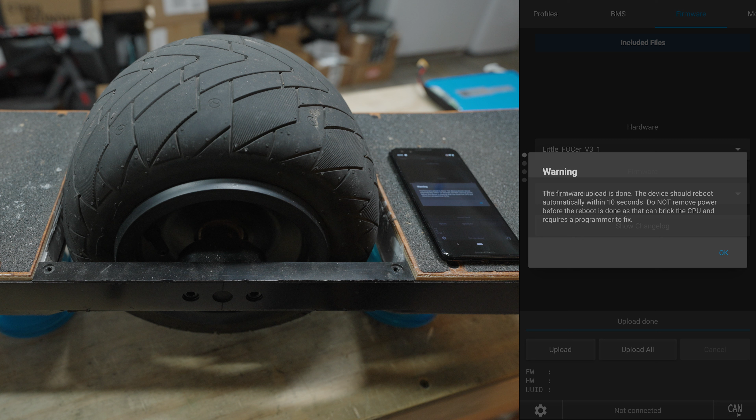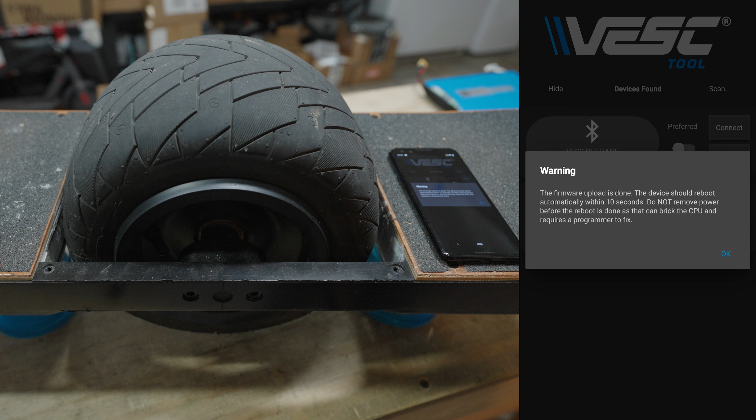It gives us the warning that the upload is done. It should reboot automatically within 10 seconds. I usually give it about 20, and then I scan for the device again. So we'll tap OK.

We've waited long enough. Hit scan up on the top right, scan BLE, and they show up again. So that means that this is on, and we will connect to the little built-in Bluetooth. Now on the firmware tab, it shows that firmware is 6.2, so that's the current firmware, and all the settings in this board are gone.

So we are going to start from scratch. We're going to go over to the Start tab. This is the main screen that you see on the mobile version when you first open up VESC Tool and connect. It shows the button for disconnect because we are connected, and you can see some RT data. This is all going to be wrong because it's not set up properly.

However, if you scroll to the top little dot, the first menu, you can see your battery input voltage. So right there, it's at 75 volts. This is an 84 volt battery, and it's roughly about half-ish. And you have your motor temperature and your VESC temperature.

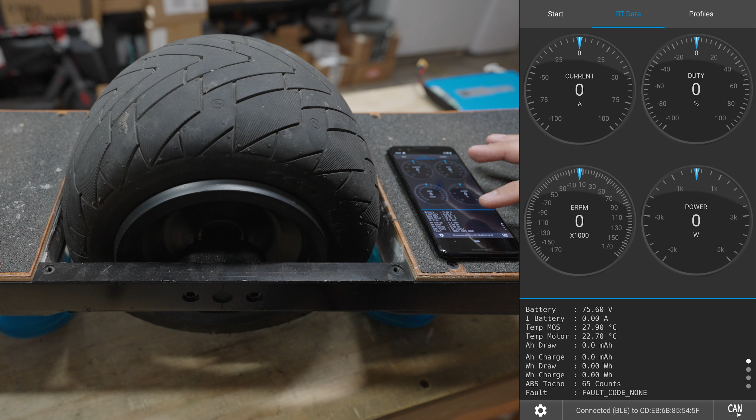So temp MOS is the temperature of the MOSFET. Temp motor is the temperature of the motor. No fault codes, that's all great. The IMU is not set up, so it's not reading anything. And so that's your information.

But we're gonna go back to the start. And before I actually do any of this stuff, we're gonna talk about battery stuff, because knowing what battery is in your device and being able to figure out some numbers is, in my opinion, very important to setting up your device.

Inputting proper values, and understanding what those values mean in terms of how it works. So, lithium-ion battery in here, using lithium-ion cells. This is going to be for demonstration. I have a stock XR battery right here, and so we're going to start with some math.

For lithium-ion batteries, regardless of the configuration, I find it useful to think of it in terms of a single cell. When we're talking about voltages, I like to think of things in terms of a single cell. And there are only 4 values, really, that you need to know and internalize for a single cell. And from there, you can figure everything else out. First, and I will have this in an article that I will link to in the description below, explaining that in more detail.

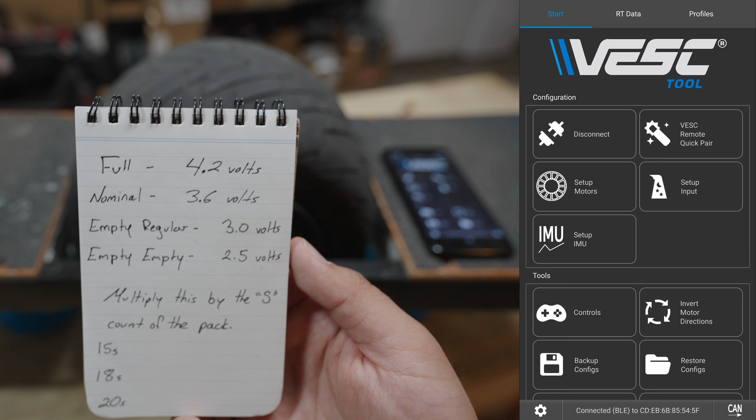So, 4 values. First one, full. A lithium-ion battery cell, a single cell, full is 4.2 volts. That's what it charges to. That's when it's full. Going above that is bad.

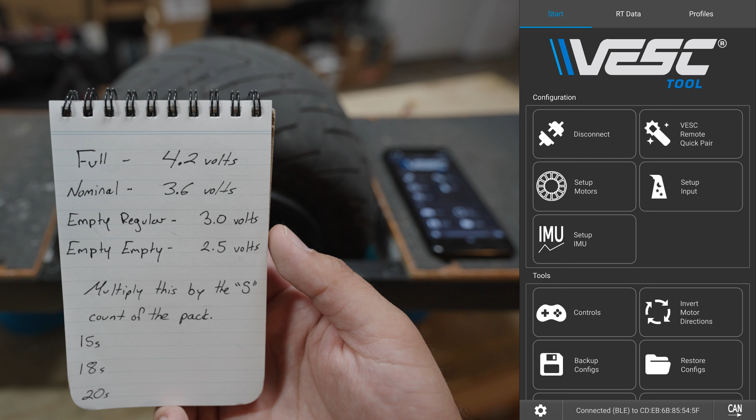Next value is nominal. It's called nominal because that is what cylindrical lithium-ion cells are named as in terms of their voltage. It's a 3.6 volt cell. You don't really use it unless you want to think of 3.6 volts as being halfway. That's about halfway through a charge, more or less.

Then you've got 2 empty values. Empty regular, which is 3.0 volts. When you're setting the low battery tiltback or pushback of your board, you base it off of, generally, 3.0 volts. Try to think of all your battery cells as being empty at 3.0 volts. So that's empty regular.

This is on cell data sheets what empty actually is, 2.5 volts. Generally, you don't want to drain a cell that far because you stress it more than you need to. It's not dangerous, but it does increase the wear. And so you can reduce your cycle life by discharging down to 2.5 volts per cell.

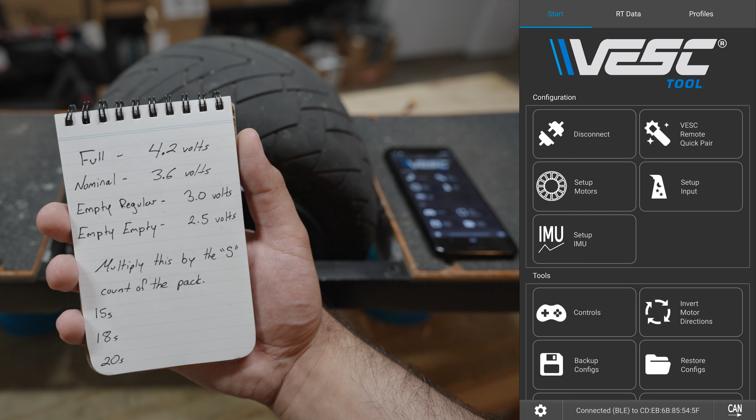And so that's not really recommended, especially because below 3 volts, there's simply not a lot of usable energy. The drop-off is much steeper, and so you're better off, for the sake of cycle life and really usable energy, to just consider 3.0 volts as empty. There's wiggle room, but if this is really new information to you, stick with thinking of empty as 3.0 volts, and I consider that empty regular, but empty empty is 2.5 volts.

Now, for your particular battery, you can simply take those values and multiply them by the S count of your battery pack. What is an S count? It's how many single cells, or groups of cells, are placed in series. Here's what I mean. This is a stock one-wheel XR battery. The configuration is 15S 2P. And that first set of information is your S count, 15S.

That means there are 15 cells in series, placed tail to tip, front to back, positive to negative. So you have 15 of them, which means if you want to find out what full voltage is, you take 4.2 volts, multiply it by 15, and you get 63 volts. So this charges to full at 63 volts.

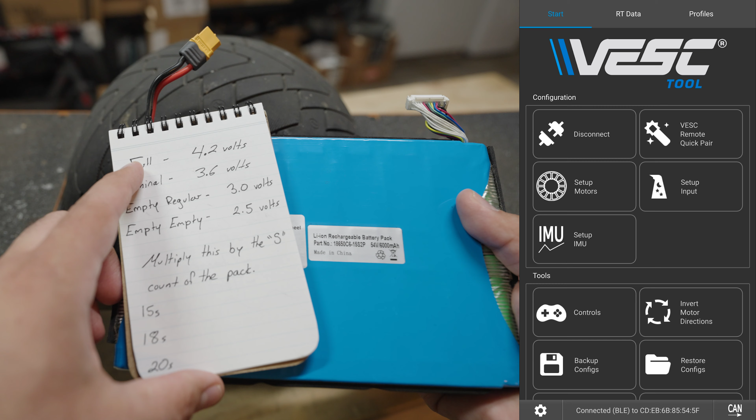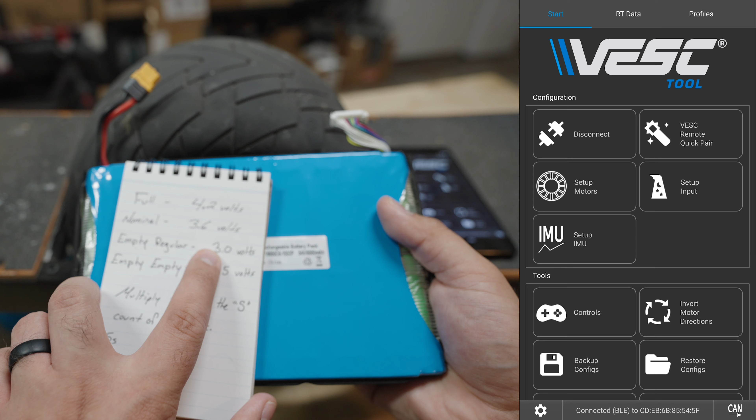You take that pattern and use it for all the other values. Nominal is 3.6 volts. If you multiply 3.6 volts times 15, you get somewhere about 54 volts, and that's why this is called a 54 volt pack, named via the nominal value. Empty is 3 volts times 15, which is 45 volts. So 45 volts is empty for this battery.

You can take that type of operating math and apply it to whatever battery configuration you have in your board, which you should get from either whoever made your battery or whoever made your board. If you made your board and your battery, this should all be nothing new to you.

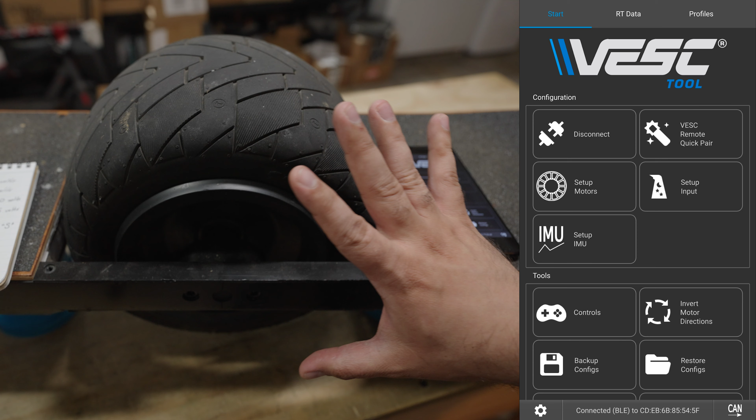So in here there is a 20S battery, which means at full it charges to 20 times 4.2 volts, 84 volts. The nominal voltage, what one would call this outside of this operating land, is 3.6 times 20, about 72. What is empty for this battery at 20S? 3 times 20 is 60. 60 volts is where this thing pushes back and tells me the battery's empty, even though empty would technically be 2.5 volts times 20.

So you do have to do some math, and it's important to be able to do this simple math so you can check your values and know what to put in here to make this thing function properly. Because if you have a 20S battery, like what's in here, and I believe is in the Float Wheel, and you start setting your voltages for a 63 volt, 15S battery like this one, it's not going to work right and you're not going to have a good time.

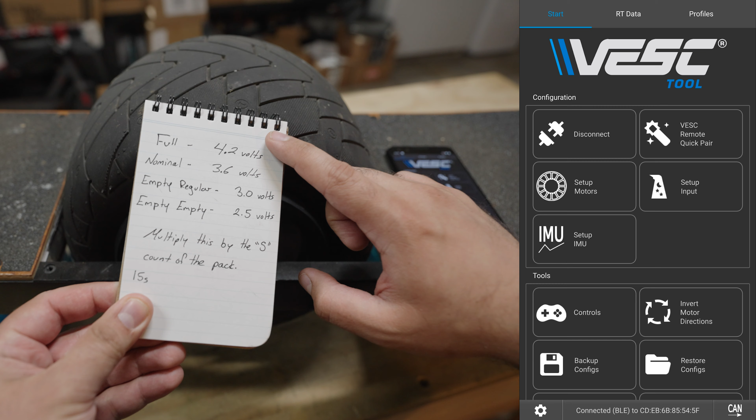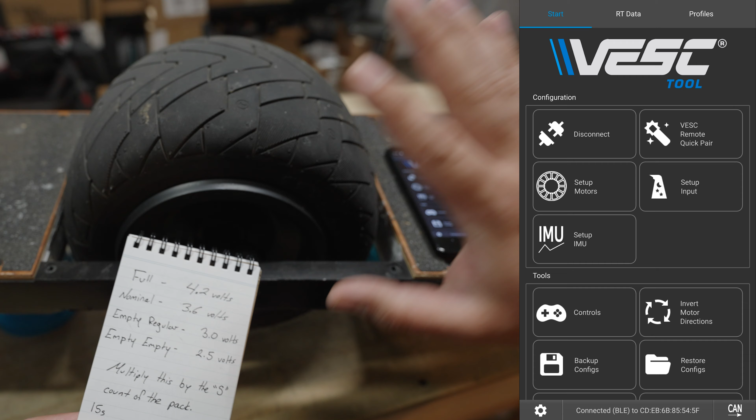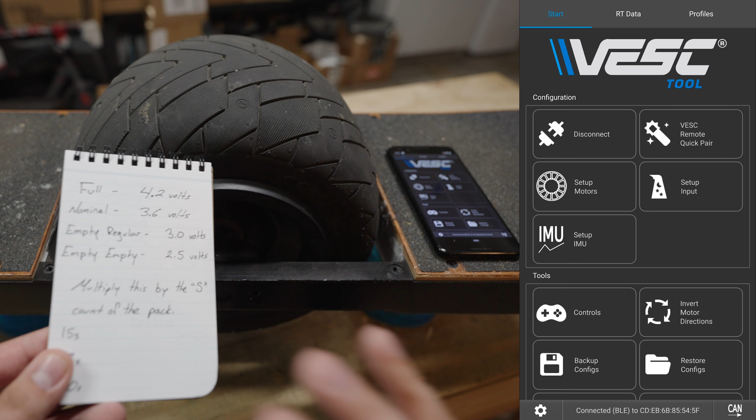So battery pack voltages based on these four values is really important to internalize, so that if you have one board with a 20S battery like this, or a Float Wheel, or another board, maybe a DIY or custom with an 18S battery, or a GT with an 18S battery, you want to be able to take these values, multiply by the cells in series, the S count, and get the values you need.

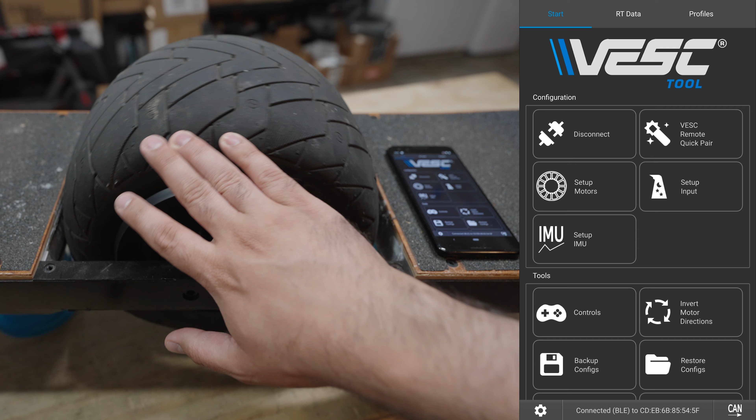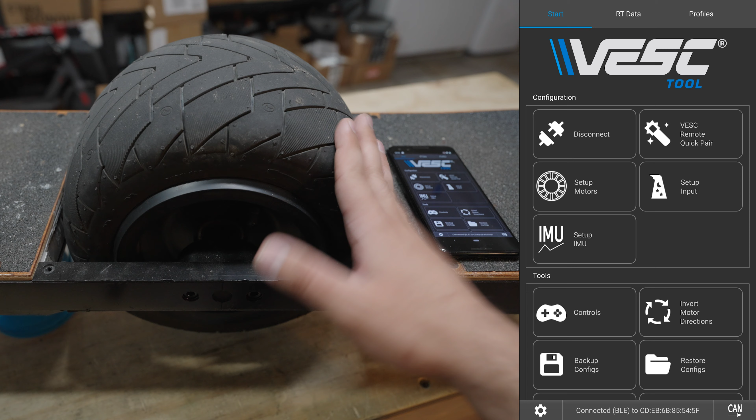What we're going to do now is the very first thing you generally do when setting up a VESC-based device like this: run motor detection. What motor detection does is the VESC runs power through the motor in a couple of different ways, and uses what it finds to understand more about how the internals of the motor are wired. There is a wizard for that, below connect-disconnect, called setup motors.

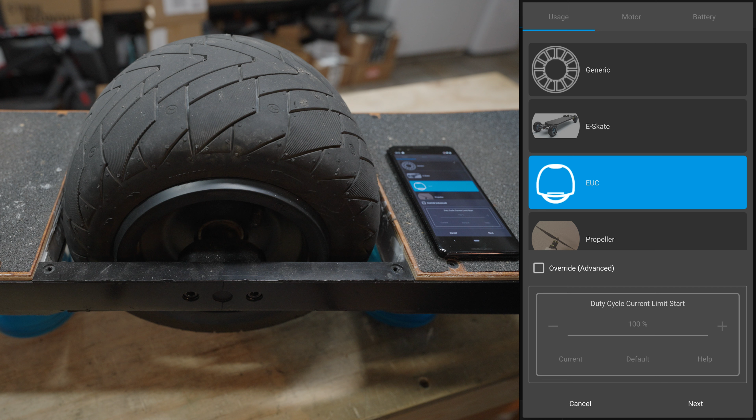I'll give you a bit of information as we go through it, trying to keep it basic, but we're going to tap on setup motors. It's going to process and load the wizard. It asks to load default parameters, it always asks this. I tap no, then I tap EUC. There's a button there to override stuff, but in this particular case I don't. I leave it at EUC and tap next.

Then it gives you a bunch of different kinds of motors: mini outrunner, small outrunner, medium outrunner, large outrunner, and others. This is an outrunner motor, which means the part that turns is on the outside.

An in-runner motor, oops, ignore that, my bad, let's go back here. An outrunner motor has the turny bit on the outside, an in-runner motor has the turny bit on the inside. So if this were an in-runner, we'd be clamping stuff to the outside and the axle would spin. That doesn't happen here, the outer bit is what turns, so this is an outrunner motor.

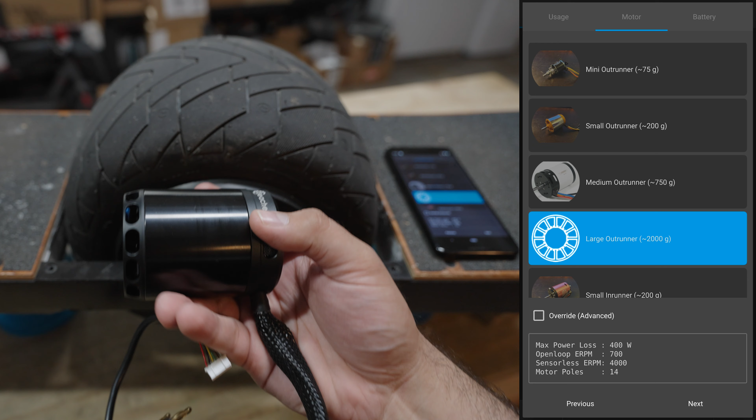It's larger than an esk8 motor, which, hold please, it's larger than an esk8 motor, which is right here. This is also an outrunner motor, because we clamp onto this bit, which is the motor plate, and the outer bit turns.

Rather than having an axle run all the way through, the axle runs through one area, and that's what turns. This is also an outrunner - what one would consider a medium outrunner, because this thing weighs about 500 grams.

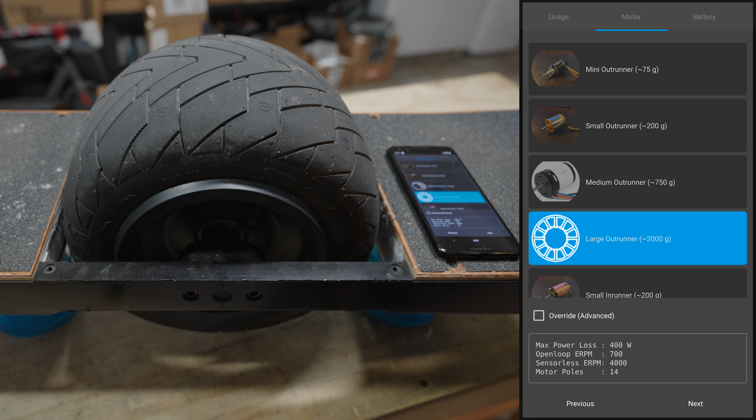A medium outrunner is about 750 grams, but a small outrunner is much less. You want to select that appropriately, because if you don't choose it right, you could damage your motor since it'll send too much power to it. So we're going to select a large outrunner motor, then go to Override, Advanced, and it's going to give us some options.

Now, the values we're going to change here, there are only 2 of them, and they apply to the Hypercore. They also apply to the Superflux, and from what I can tell and what I was told by Surfdado, who looked closely at the previously published video on setting up the Float Wheel, the values for the Cannon Core appear similar to the Hypercore.

So it stands to reason this will apply as well. First thing we're going to change is motor poles. This has 30 motor poles, the Superflux has 30 motor poles, and I'm fairly certain the Cannon Core has 30 motor poles too. We're going to change the sensorless ERPM value from 4,000, the default, to 2,000 - that's the ERPM limit where it changes from using the Hall sensors to not using the Hall sensors.

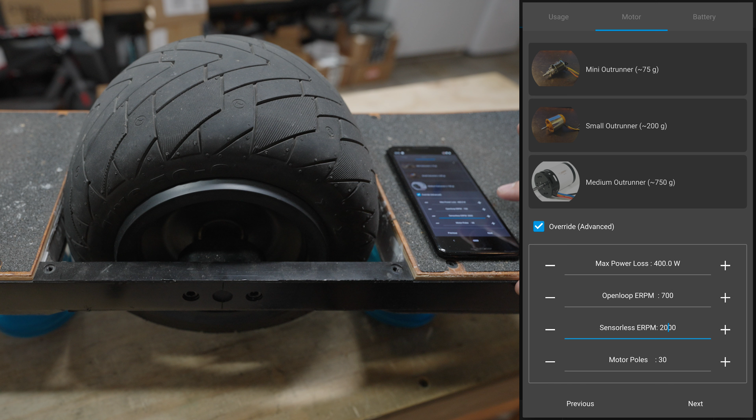Those are the only 2 values we're changing right now. Once those are changed, we hit Next. It will give us another warning to make sure we chose the right figures for the motor, so we don't damage it when power runs through it. So we click Yes, and here it's going to ask us for battery information.

This relates to what we talked about before, and it doesn't really affect the performance of the motor. What it really affects is the stuff that shows up on the real-time data screen - things like battery percentage or watt-hour consumption. However, since we're here, it's a good idea to fill it in with the information that relates to the battery you know you have.

So, battery cells in series - we just spoke about that. This one has 20; if you have a Float Wheel, you probably have 20. If you're using an 18S battery, you would put 18. You should know what the S count or series count of your battery is, because the person who made your device or battery will tell you, and that's the configuration you'd find on it. A stock XR battery would be 15 cells in series, since it's a 15S battery.

Battery capacity - the maker of your battery or device should tell you that. The long and short of it is, the battery configuration here says 15S 2P. 2P means there are 2 individual cells making up a single bigger cell, like a parallel group. That's what the P is for, parallel - how many cells are in parallel.

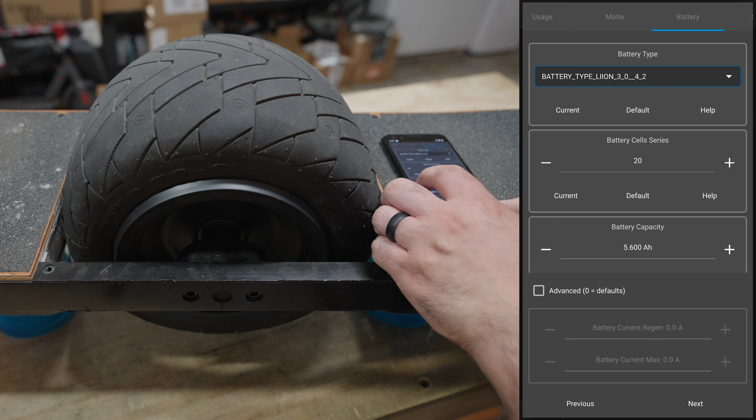So for now, I'm just going to do what I know the battery is going to be used with. So battery current regen, that's your regen braking, that's how much power it's going to stick back into the battery when you're braking. I set that to -25. I'd say -25 is pretty decent. Battery current max, I put this at 40. 45 is probably fine, I'll put it at 45 for this. I know it can handle that.

By the way, for the battery current and the battery current regen, what I do not recommend you do is take the current figures from a cell's data sheet and just multiply it by your parallel group size and put that number in there. That's not a good idea. For example, if you have a battery pack made of the Molicel P42A or the Samsung 40T, and if you Google them, it says it's a 35 amp cell, or a 40 amp, or a 45 amp cell. Do not take that, double it by the 2P figure in your battery configuration, and then assume you're going to set your battery current to 90 amps. Don't do that. It's not a realistic figure. Not that you would ever actually pull that many amps from a device like this, but just don't do that. That's not a realistic figure at all, and that number ignores all of the context of how, for the most part, these cells are being used. So just don't do that.

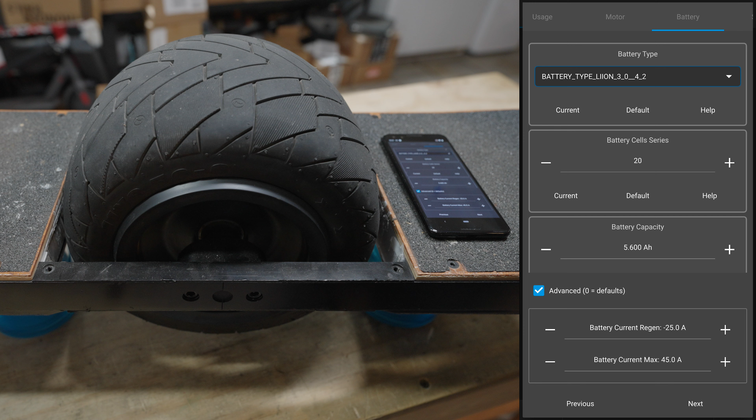So that's what I'm going to put, and I think that's reasonable, and I think that offers exactly the kind of performance one needs, so that's what I'm going with. So we're going to hit next.

Gear ratio - there's no gear ratio because it's a single wheel on a single motor, so it's direct drive.

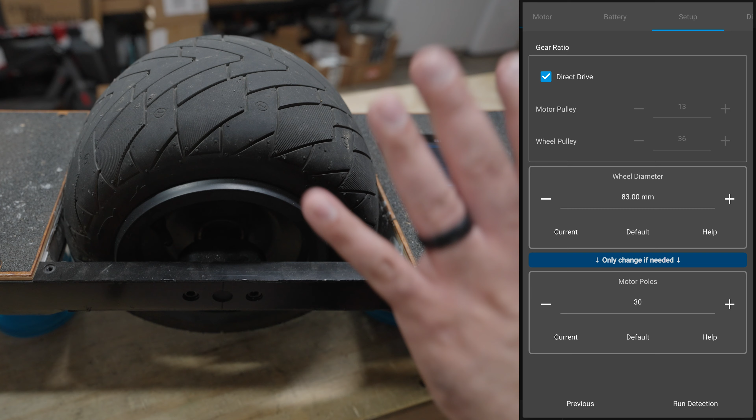Wheel diameter - if you don't want to measure your tire at its inflation pressure, you don't have to. I recommend you do, by taking two sticks, pointing them out here, and then sticking a ruler there and measuring the millimeters of your actual tire diameter. That will give you more accurate speed figures in the real-time data tabs, and probably in Float Control if you're using that app. You don't have to, you can just guess. If I'm trying to be quick with it, I'll just assume that this is about 283 millimeters. This in particular, I think, is 288 millimeters? 287, something like that. This is close enough that it's not going to be so outlandish of a figure in terms of speed. I'm not going to be going 10 miles an hour and it's not going to show me like 30 miles per hour. So if you don't want to measure it and want to measure it later, you could just put that right there, and that will technically work.

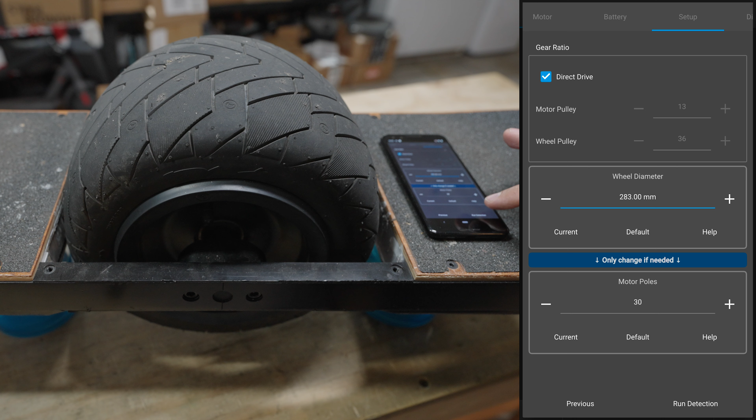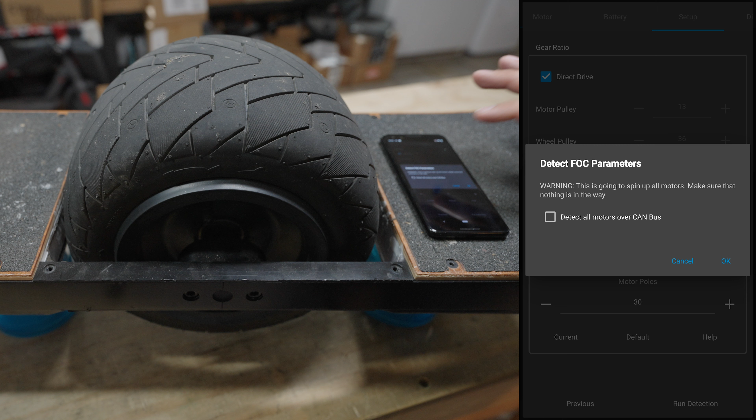Motor poles is still at 30, and then we're going to tap on run detection. That's when it's going to do its thing. It might default to having detect all motors over CAN bus. I'm going to unclick that because no motors are over CAN bus, it's a single VESC with a single motor. So I untick that and click OK. And now it's going to do stuff.

Now it's detecting Hall sensors.

All right, so it's going to give you detection results. It'll say success even if it's not successful - it sometimes just says success and then gives you crazy values, but these values look relatively normal. I will post the values I got here in the article linked in the description, and I will also link to a PEV.dev article with hypercore and other motor information to see if what you're detecting is normal. Because if you don't have any spare parts to troubleshoot with and you have no experience troubleshooting, and you don't know if your motor is actually good, it can help to have values from motor detection to compare against. So if one value is wildly different from what everyone else with the same motor is getting, that's a good sign something is wrong with your motor or your VESC.

So I'll post these numbers, and again, I'll post a link to an article with known good values and more information on that. This looks normal.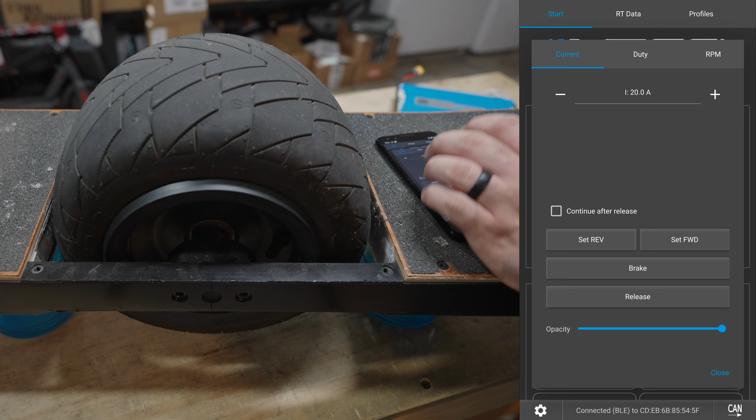If you want to have some fun with it, you can up the current just to see how it responds at, let's say, 20 amps. Reverse. Brake.

Obviously be careful, probably shouldn't do what I was doing. I was having some fun, but don't do that, you could get hurt. That is a way, if you leave it at default like 3 amps, like it is normally, you'll be able to see if your motor's actually functioning.

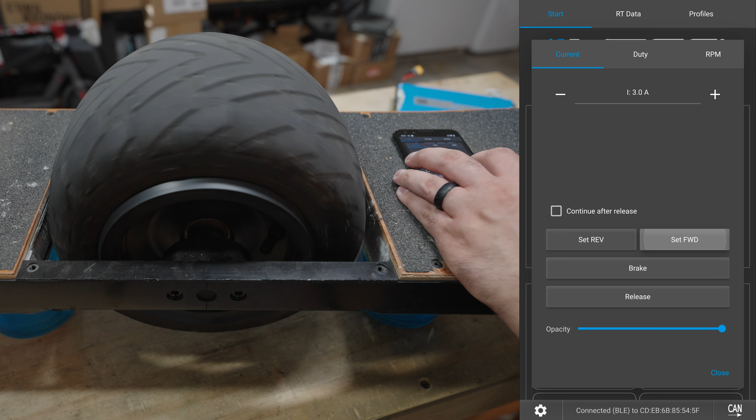I do this on e-skates too, just to make sure that the detection actually makes the motor work. Now, this motor is functioning, it's working. It's not optimized because there are a couple of values to change, but it is now working.

So we're going to close this, and then go into the motor configuration area, and change a few of the values that are going to help optimize this particular motor. They do, in some cases, also carry over into motors like the Superflux, and I'm guessing the Hypercore.

If there's more, better, updated information specifically, those values are going to be pertinent to this Hypercore, which is a future motion motor. However, those changes also, in part, can apply to the Superflux, and it stands to reason the Cannon Core.

If there's updated information that I get after making this video, I will go ahead and post that in the link below and likely do a more specific video on setting up the Cannon Core. But more or less, generally, this motor is now functioning. There's a difference between functioning and optimizing.

All right, so in the motor config tab, there are 2 steps to do. One is the important critical stuff to make this motor continue to work properly. And then there's the other stuff for optimizing for a specific motor.

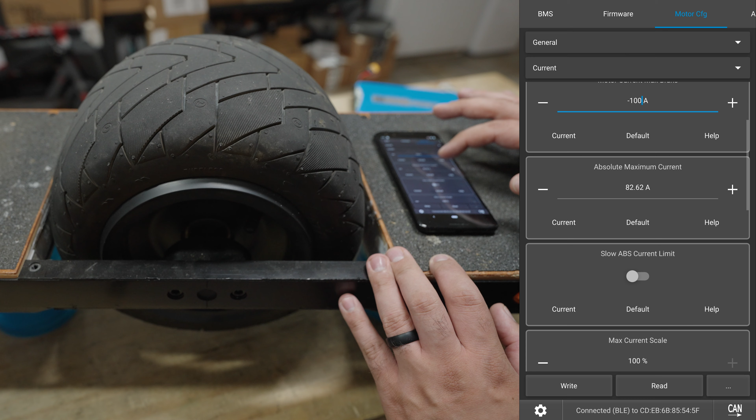Absolute maximum current - I'll explain why in a second. Absolute maximum current is the absolute maximum current that the VESC will allow to be detected at the motor. There's some granularity, some details as to how it measures it and why it would reach a higher current, but that absolute maximum is really the brick wall. If the VESC detects more than this through the motor, it will throw a fault code and shut the motor off.

So you want that to be pretty high, usually about 150% to 200% of what your motor current max is. So 82 amps is not going to cut it. We're going to put it at 180 amps absolute maximum current, and that should put it far out of the way. However, if the motor is cycling 180 amps, we will throw a fault code and the motor will shut off.

The rest of these, right below those current values, you don't really need. So we'll go down to that blue tab, battery. We already set this when we were doing motor detection, so those values are there: battery max current 45, battery current max regen negative 25 amps. I'll leave reading in the description below with some more information on battery limits and why I set them the way I do.

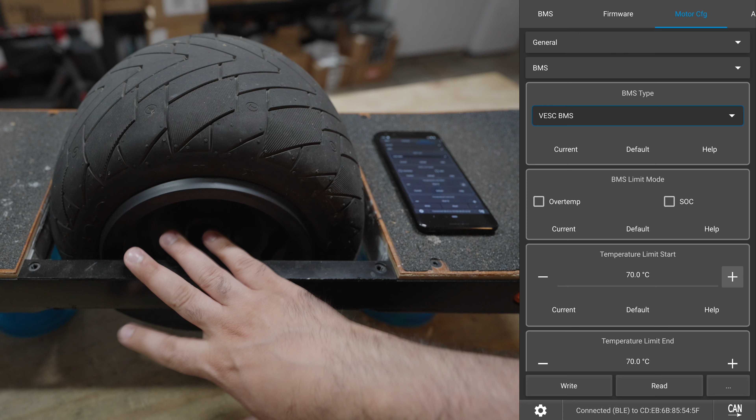That would be bad. You can use BMS data if you have an ENNOID X-Lite, but you want it to inform tiltback or pushback to signal you, not to just turn the motor off, because that would be dangerous. So that's why I uncheck those and bring SOC limit start down to 0, and all that stuff is 0. And then you write. That just means the BMS information won't affect the motor, which would be bad. All right, so that's that tab.

And now we're going to go to a very important part. This is really important, super important. So we're still in general on top, the second dropdown: voltage. Motor config, general, voltage. This is super important—these are battery voltage cutoffs.

What the battery voltage cutoffs do is, depending on your battery level—the voltage your VESC is seeing at your battery—it will inform the motor, and that is not what you want it to do. Anything to do with your battery percentage or voltage, anything that's a low battery or high battery, you want it to translate into pushback or tiltback to signal you, not to shut the motor. So in motor config, general, voltage, these cutoffs shut the motor, which is bad.

So you want to make these at a value where you won't reasonably reach them. Here we see battery voltage cutoff start and battery voltage cutoff end. Cutoff start means it's going to start throttling back the power at the motor, making it weaker, and you'll lose acceleration. But you need acceleration to stay balanced. Battery voltage cutoff end means the motor shuts off.

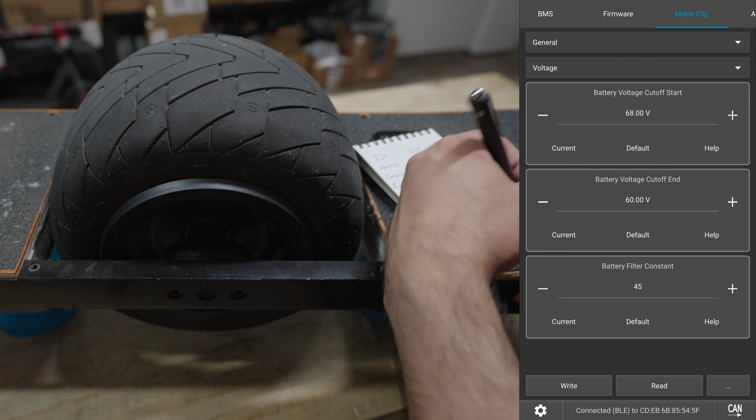Let's say 2.3 volts per cell. This is a 20S battery. I'm going to do 2.3 volts per cell times 20, which is 46 volts. And so I will put battery voltage cutoff start at 46 volts.

Okay, battery voltage cutoff end. Let's say 2 volts per cell times 20. Battery voltage cutoff end, 2 volts per cell times 20 is 40. So we'll go here and we will put 40 volts.

So these are the battery voltages that a 20S battery will actually start to shut the motor off, and that is below pushback or tilt back voltage. That is important. You do not want those at 3 volts per cell, you don't want it near that, and I don't even want it near 2.5 volts per cell because this will drop you right at pushback if you do that.

So here for a 20S battery, 46 volts start, 40 volts end. That's what I put. Confirmation, fantastic. Okay, and now we're done with the general tab on top.

Now we're going to go to the FOC tab on top, and we're going to start at general. So now we are slowly entering the realm of optimizing the settings for the motor, and these will become a little bit specific. What I'm doing here, I'll start with things that will apply also to the superflux, except for a couple of things, and I'll cite those. But this is another area where you really want to go into the description, click the links in there with the extra reading, and find out what values have been found to optimize for a particular motor.

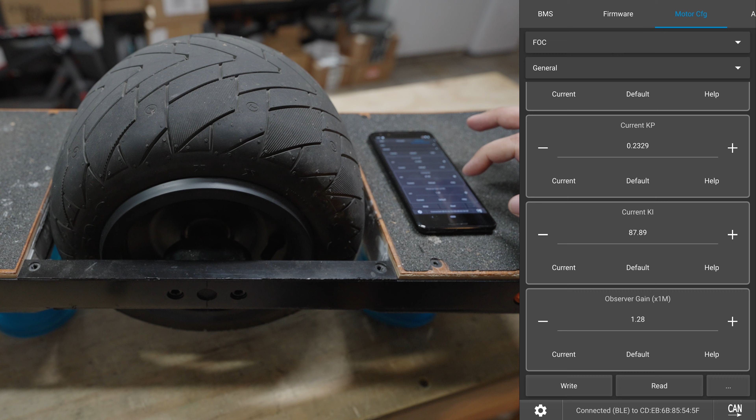All right, down here, observer gain, that's the last one there. We're going to take that value and we're going to cut it in half, so anywhere between 0.75 to 0.85, something like that. This is reading at 1.28, so 1.28 divided by 2. So observer gain for the hypercore, it seems that it works best to set the observer gain to 0.75 or so.

For the superflux, whatever detected value is there, which is usually about 1.4-ish, cut it in half. So for the hypercore, I'm setting that to 0.75. For a superflux, I would just take that value and cut it in half. All right, so that's all we're going to do here for now, and we're going to hit write.

There's one more thing you can do if you're using a hypercore, and that is reduce motor inductance. There are some different values you'll find on the forums and on posts in the Facebook groups. This one in particular detected at about 233-ish, and so lower that. In this particular case, I've had good luck

with a value here for this hypercore at 200, and you'll find a variety of values. Sometimes it's 198, thereabouts, but lowering it to around 200 seems to do well for the cogging and crunching sound under hard braking. If it doesn't, you can return that back to its prior value, so make note of that, and you should be good to go. And that is about it for this, so we will go ahead and write that.

Again, this is something where you really want to click the links in the description below and look at the values that other similar setups have gotten from detection, and the changes that have been made for optimizing the performance of that particular motor.

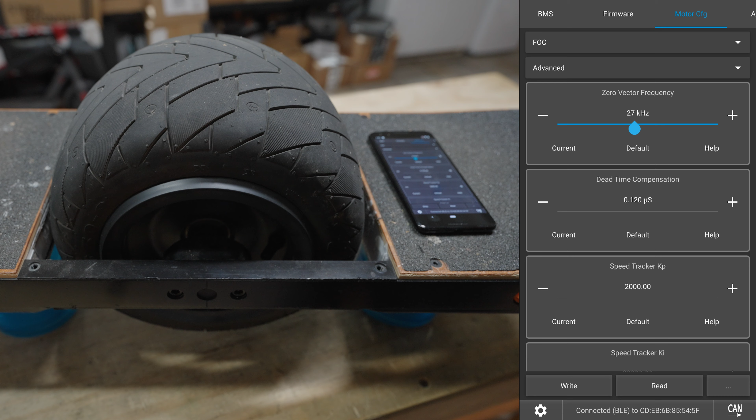We're now going to go to advanced. We're still under the FOC dropdown. The zero vector frequency is basically the switching frequency for the VESC. A couple of things can happen from it being at 20 kilohertz, no sense getting into the nitty-gritty of it now. However, most folks have had good luck raising this anywhere between 25 to 30 kilohertz. In this particular case, I'm going to put it at 27 kilohertz because I've had good luck with that, and then I'm going to hit write.

Now, after setting your zero vector frequency, what I do for this particular motor, the hypercore, is change the observer type, found in the same place, FOC advanced. Scroll all the way down carefully, you don't want to change values, and you'll see observer type. The default observer for VESC firmware 6.0, and I think everything after, is MX Lemming Lambda. For hypercores, I set it to Ortega Original. For the superflux, I don't change it, I leave it at the default MX Lemming, and it works fine. However, for the hypercore specifically, I will change it to Ortega Original, and all the other value adjustments still stand.

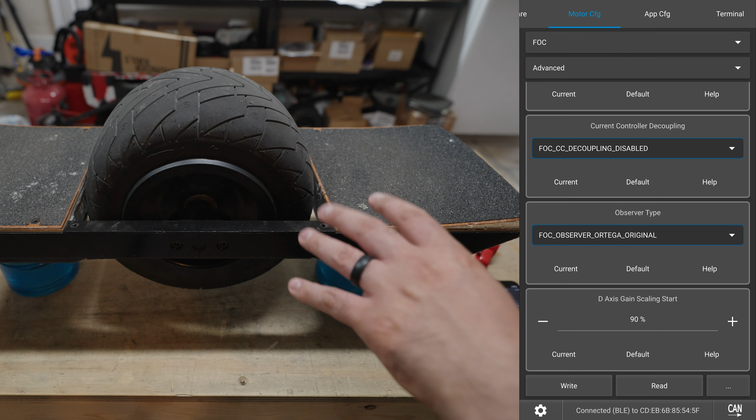I have found that in some cases the hypercore motor sounds, feels, or behaves oddly with the newer observer, so I imagine it's just a motor-specific thing. For future motion motors like the hypercore, I'll change the observer to Ortega Original, but for the superflux, the Fungineers motor, I won't, I'll leave it as default. I'm not certain yet what the Cannon core motor would work better with, so that will have to be tested. Chances are, if it's anything like the superflux, the default observer will be fine, but for the hypercore, I find Ortega Original is a better observer.

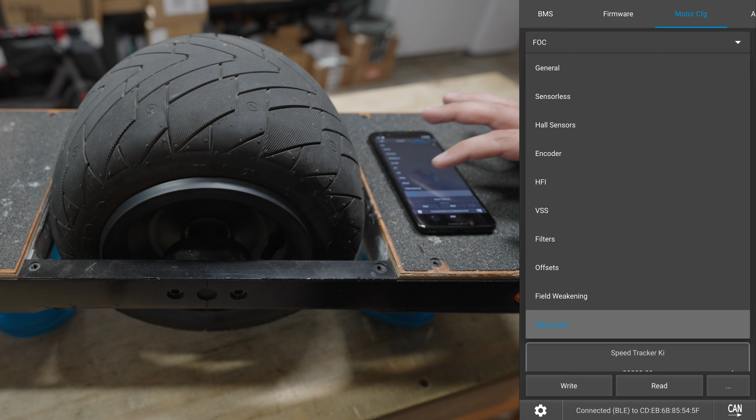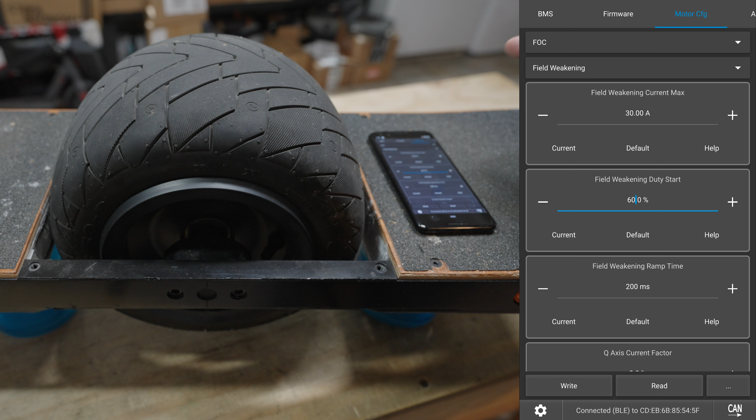Next, we're going to go to field weakening, which is disabled by default. Field weakening is a way to increase the top speed of the motor per the voltage of the battery. By default it's disabled, and the general consensus of a decent place to start is to raise the field weakening current max to 30 amps and the field weakening duty start to 60%. That's a good default, and you don't really need it unless you're actually looking for extra top speed. Some people don't use field weakening, however those that do, these are good basic values to set. Again, link to information that describes why that is.

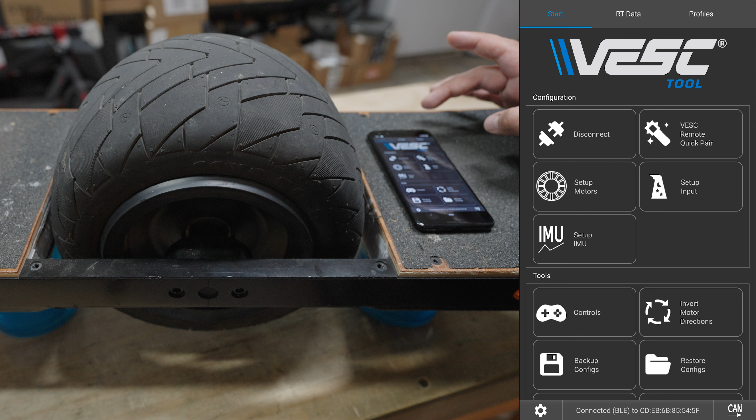So that's been done, we'll hit write. Now we're going to go to the start page again, and back to controls. After all these changes, we want to make sure that this motor actually still functions and it's not just going to cog out and do weird stuff. So we're back where we were.

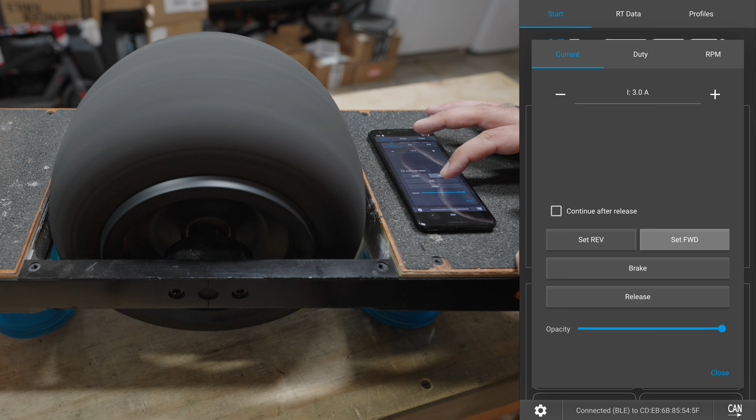Forward. Reverse. Ignore the wobble, I've found that if the board's just been sitting there and you do that, the tire sealant that may or may not be in it just pools. So when it starts turning very quickly, it just sticks in one area and starts to wobble until you sort of even it out. So you can try that, and then hit reverse.

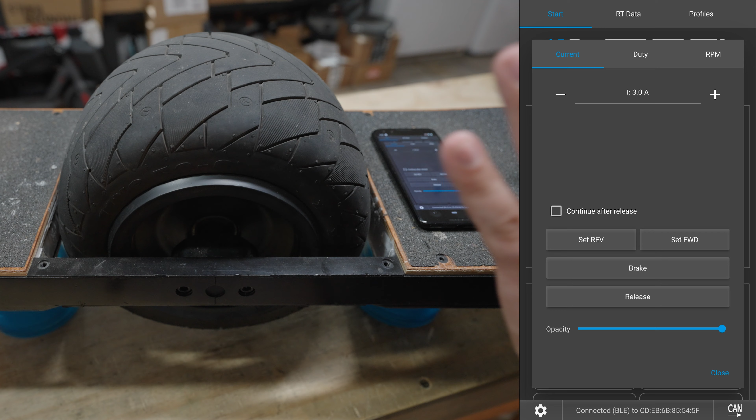All right, the wobble is a little less, but either way, that wobble is normal if it's just suspended on two tiny little posts here. So we've checked that this thing still functions and there's no abnormal goings on with the motor, and that's good. So I would consider this functional, and I would consider us done configuring the motor, which means now we're going to configure the IMU. So the motor's done.

Next step is the IMU. Now that we have the motor functioning and partially optimized for the most part, what we're going to do is calibrate the IMU, which stands for the Inertial Measurement Unit. It is a unit that measures inertia through several sensors. So some of this is going to involve moving the board, and some of it's going to involve making sure that it's level via pitch and roll.

One of the tools that I think is really important to have is a simple bubble level with a flat edge. You can of course use a bubble level app on your mobile device, however they don't really work as well as a traditional bubble level. And these are not very expensive — you can find one for $10 at a hardware store.

So these are really, really handy when it comes to making sure that your axes are actually level. This looks flat, it looks like it's leveled, but it is not — it's actually a bit nose up, so I will shim that side in order to get this properly centered. The same goes for the roll axis. These are standard flat XR foot pads, however you might need to do a bit of navigating to make sure you can get a flat seating area for this. It's also leaning slightly this way, so when I get to that axis, I'm going to have to shim it to tilt a bit that way. Now, is a quarter of a degree, half a degree, or 1 degree going to make a difference? It can — it can manifest in different ways with how the board rides. So I do recommend just a cheap, simple bubble level. That, I think, is an integral tool for this process.

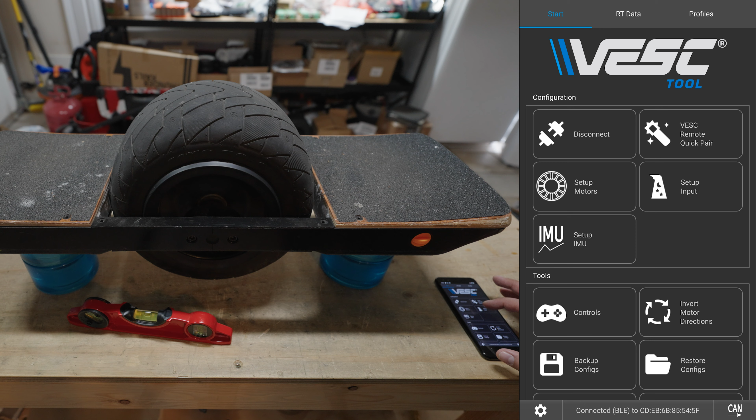So we're going to go ahead and tap on IMU. The board is still on, we are still connected — or you've taken a break and now we've reconnected. So we're going to tap on Setup IMU, which is below Setup Motors. We're going to do these in order.

So the first one, IMU Configurator, it's very simple. You merely input what kind of device this is, and it should, up at the top, under IMU Detected, show True. If you have an external IMU, you may not get a detection right away, and you might have to troubleshoot that. However, the little FOCer in here, which is one of the more common VESCs used in this application, has an internal IMU, so it's detected. It does say in the IMU type that the internal IMU is timed out — I've seen that before, especially with older models. It doesn't really mean you're going to have issues, and the newer little FOCers seem to all read the type properly. However, if it is detecting the IMU and that is true and it's green, for the most part I haven't seen that present any issues going forward, so we're just going to trust that that's going to work. Below that is the IMU Profile Selector.

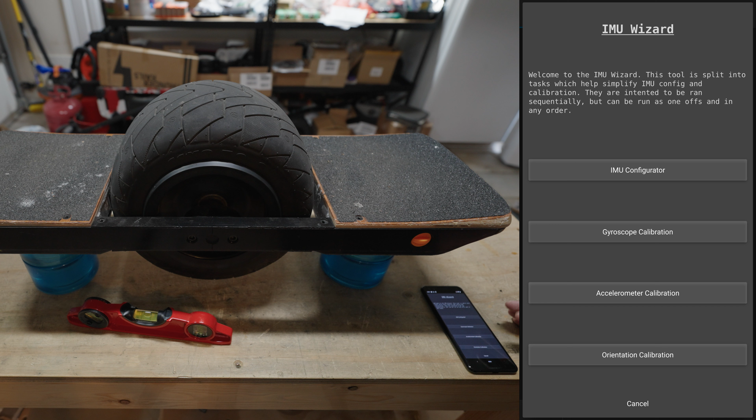Oh, by the way, before we do that, you can tap on Search for IMU, and it will look — now we're waiting. Okay, and it's the same, it's still detected as being true. So below that, IMU Profile Selector, bottom right, Balance Skateboard, which is what this shape is. So we'll tap that, and you'll see the values change. When you click Save, it will save those values to the VESC. It's a bit hard to see, but below this wizard window there's a little blue line there — that was it writing and saving, that was the confirmation for that. So that first button is now completed.

Due to the internal timeout result in the internal IMU detection, you may note that the frequency value did not change to what it should have, which is 832 Hz. This will cause odd behavior due to sync issues with the sample rate of the IMU and the operational frequency of the float package. If you note that the frequency was not changed to 832 Hz in this first step here, you will have to change it manually.

I recommend doing this after the rest of the steps, so I will put that clip at the end of the clips for the IMU wizard, which we're just going to continue now.

Gyroscope calibration. This says to just leave it alone. It doesn't necessarily have to be level, but in order to calibrate the gyroscope, it needs to just stay still. We're not touching anything, and nothing around us is moving that could shake this, so we're just going to leave it. Once those values more or less stabilize, then we'll tap save. The values are going to flutter - that always happens - but they should more or less stabilize in a general area. So we'll just hit save, and that's about it for that.

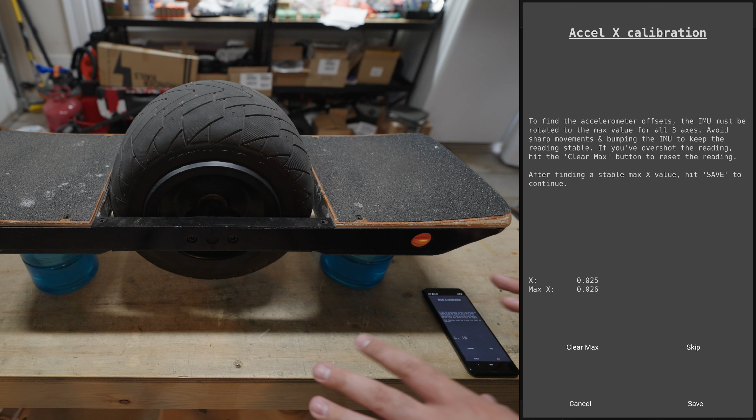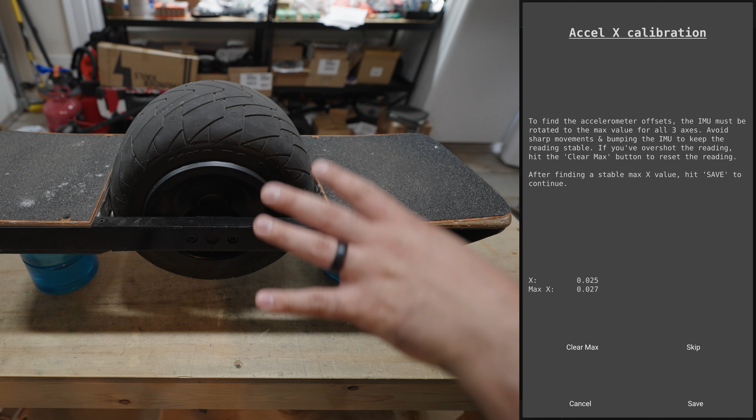Now the next two, you're going to have to do a little bit of movement. Accelerometer calibration. Here we go - we're going to move this and take the board off of these stands. If you have a milk crate or other work pieces holding this flat, you'll need to remove them. During the accelerometer calibration, it's important to move the board fluidly and gently. You don't want to just take this off and drop it, or make jerky movements or really big movements where you're impacting parts of it, because those impacts will register falsely high values and screw everything up.

There's a button here to clear max, so if you happen to drop one side of it, or hit something, or impact an edge and it gives you a crazy large value, you can clear the max and continue on. But we're going to try to avoid that and very gently move these work stands away, without any very large movements.

The goal for these is you're going to do it on three axes, so three sides, and you have to find them - which is exciting - to get them to their maximum value, which is somewhere around 1. It might be 0.998, might be 0.999, might be 1.012, but around 1, not -1, not 2, 1. That's what it should be looking for as the maximum value.

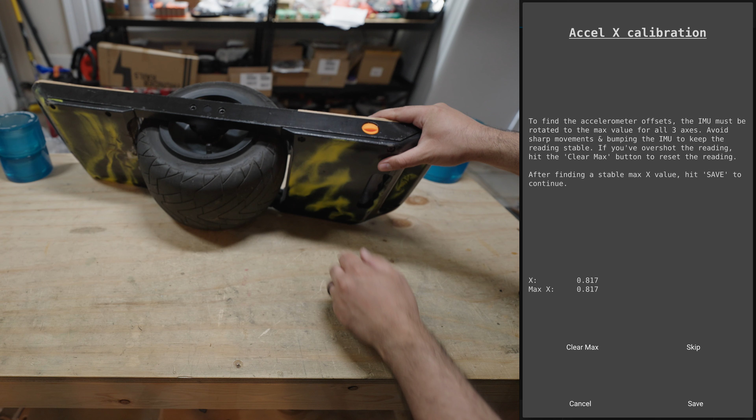So here's the x-axis. We're going to move it until we see it starting to go up. Okay, it's going down - that's not what we want. Okay, it's starting to go up. We're going to very carefully... alright, so it seems that this is the position it's going to be in for the x-axis. We'll wait for it to stabilize, and see if we tilt it a little bit more if we get any more of the value to rise up. Going to do a little bit this way. Alright, so it seems - oh, we hit 1. A value off by like a thousandth is not really going to be that big of a deal, so 999 or 1 is fine. That's where we're going to leave it, and we'll click save.

Now it wants us to find the y-axis, and we're going to do the exact same thing, but find the y-axis. I think it's the nose, so we're going to bring it back and watch the y-axis value to see if it goes up. We push the nose down - okay, so yeah, it is the nose. I have to do this around the camera. Very carefully raise the tail, and we'll see that it is going up. Okay, so it seems that this is going to be where we want it for the Y value. This might not be the direction your board needs to be for the Y or X value - you need to very fluidly and gently find the direction you need to move it so the values move up towards 1.

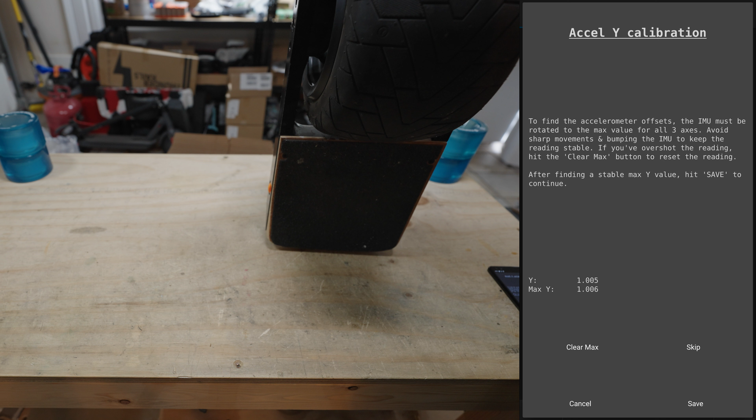So for your board, it could be that the tail is down and the nose is up, or the board could just be flat, straight up, or upside down. Any direction, you just need to make sure that it is on the Y axis. So we're going to click Save.

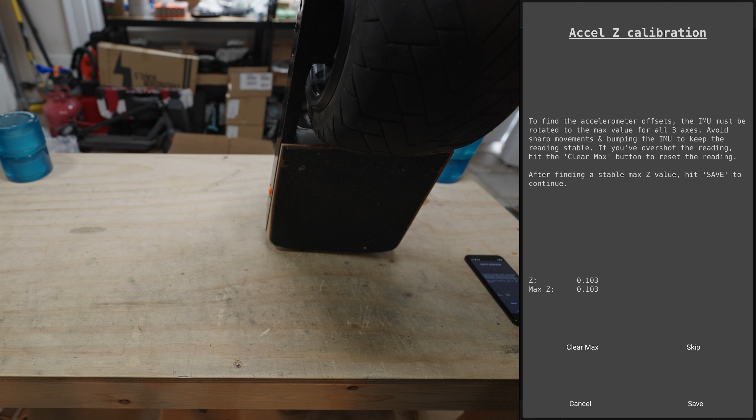Now I need to find the Z axis. This is the final one to do with this particular board. I believe this value, it's just upside down. I'm tilting it this way and I see it going up, so yes, I think this is just going to be upside down.

Careful. Okay, and so it is upside down. I don't know if this looks a bit high, so I'm going to clear the max and let it do that again. No, it was fine before.

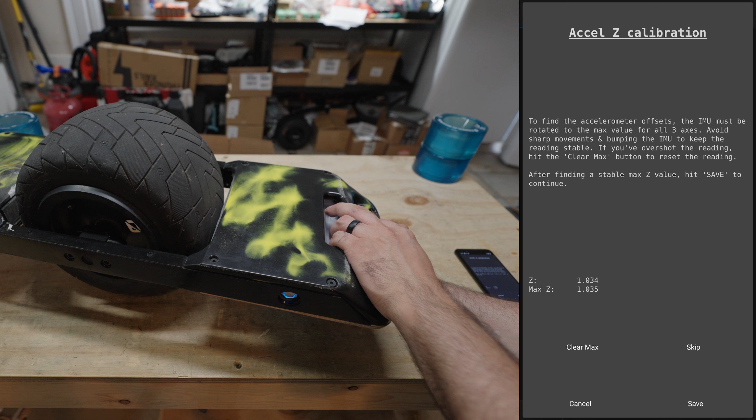I'm just going to move it a bit, see if I get a higher value than that. It does not seem like I am. No, it seems like 1.035 is pretty much where it's at, and a difference of a thousandth is not going to matter. So we hit Save. Okay, so that was the accelerometer calibration, and now we are done with that.

We have one more button to go in the IMU wizard, and I believe this is the one that is going to involve it being propped up flat. And so there you go.

Orientation, so roll angle. Okay, so we're going to have to level it out. This is the point where I'm going to put it back on these wheels functioning as stands. This is the point where you would put it back on a milk crate, wood blocks, whatever you're using to prop up the board flat.

And this is where we're going to bring in the bubble level, because it is asking us to make sure that the roll and pitch axes are flat. So we're just going to go ahead and do that. These are my shims because I know this is not perfectly even.

All right, so we're going to do pitch, which is nose to tail. This is slightly nose up, so we're going to shim the back a bit. I believe this is enough to just even it out. Yep, that did it. You might need to do more or less, whatever, but this is very useful to have.

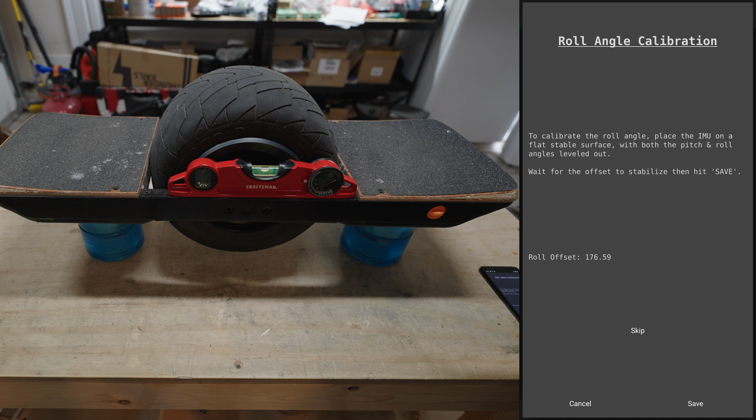Pitch axis is level. Okay, back to the device. So, calibrate roll angle: place the IMU on a flat stable surface with both the pitch and roll level. Okay, so the roll offset—now you'll see that the roll offset value has been changing this whole time, and it's settled there. We know that the roll offset we just measured is good.

Yep, so this is roll. We'll tap Save. Pitch, that's the nose to tail, that's your lean angle. So we'll just check that, make sure that that's good, and we will wait for this thing to sort of iron out. You'll see the pitch offset is about 0.5 something. It's fluttering, but that's fine.

Okay, yaw angle. So the yaw angle is, I believe, basically just steering, it's like this way. And so what we're going to do is lift the nose up to about 45 degrees, which we can do just by taking the rear holder off.

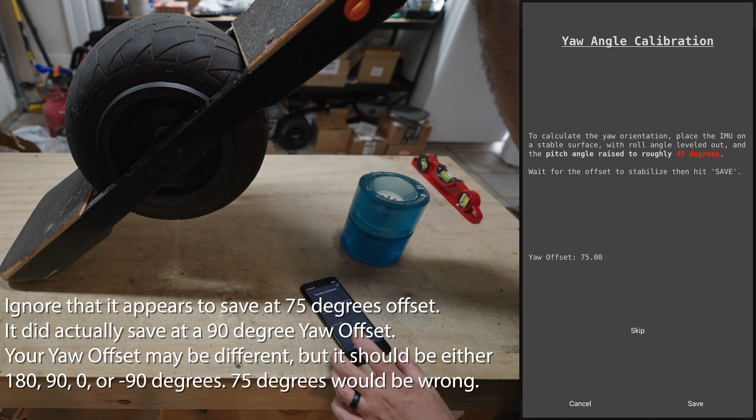If this were in a milk crate, you would just take it out of the milk crate and then put it on your bench or the floor, wherever you're doing this. So we're going to lift it to about there, and the yaw offset will be approximately 90 degrees. So we will save, and then that is it.

Again, your yaw offset should be a multiple of 90 degrees, unless your VESC has a specifically odd mounting orientation. The flickering in the previous clip between 75 and 90 degrees was likely another symptom of the internal timeout error I got earlier, or just something else. However, it illustrates an important point: you will have to learn what value ranges are correct and adjust them to be within those ranges. Don't always rely on wizards, as they are imperfect.

VESC is usually imperfect, and it's usually best to manage imperfections rather than deny them.

After the IMU wizard, once you're certain you did everything right and it's matching up and functioning well, one thing I check is in app config under IMU. Usually it's under general when you get to the app config tab, but I go down to IMU and look at the sample rate.

The sample rate usually changes once you select balance skateboard. It'll change the sample rate to 832 hertz, which is what the float package runs on. Sometimes it doesn't change automatically. If the sample rate is not 832, hold and select it so it's set to 832, and then we'll write that.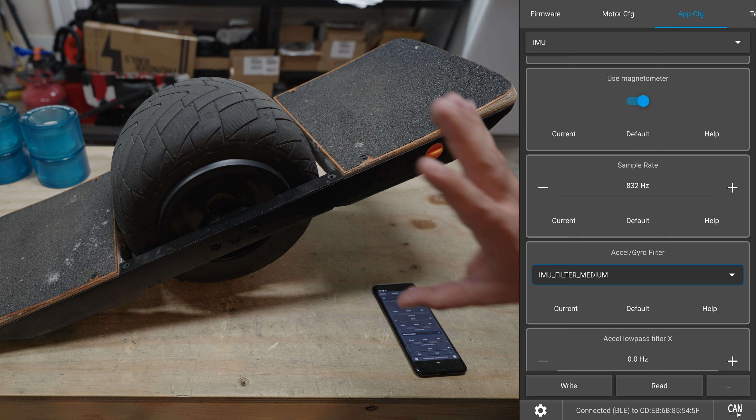If they're at different frequencies, this will feel weird - it'll act weird. If you've got a weird vibration thing going on and you're certain you've done everything else properly, you might want to check that. So I just check it to begin with and make sure the IMU sample rate is at 832 hertz, matching the float package. Usually the IMU wizard does it, but it's worth checking because sometimes it doesn't.

If you have IMU issues, or it's not riding properly when you're all done, and you're pretty certain you just messed up the IMU calibration, here's how I go about redoing it. Do not just immediately go back to the IMU wizard, because in some cases it may take the default values and then write more values on top of it, and that's not going to help you.

What I would do is go to app config, drop down to IMU, and all your IMU data is here. Click or tap the three dots, go to read default settings, and then write. That will reset all of that and zero everything out. When you tap write, everything will be blank, and you can go back and redo the IMU wizard again.

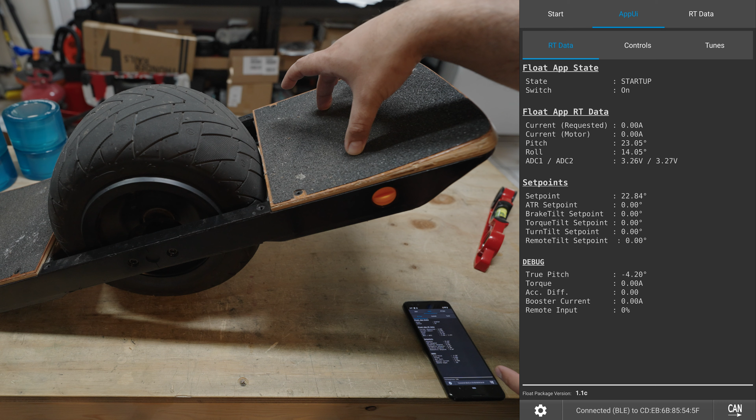We haven't used it yet, and the switch is your foot pad. So you press one, it switches to half state. You press both, it's on, meaning this is primed to turn on when it gets level. This is just making sure your actual foot pad works - the easiest way to see that it's registering above 3 volts, and that when you're pressing both, you're registering above 3 volts and it's reading that.

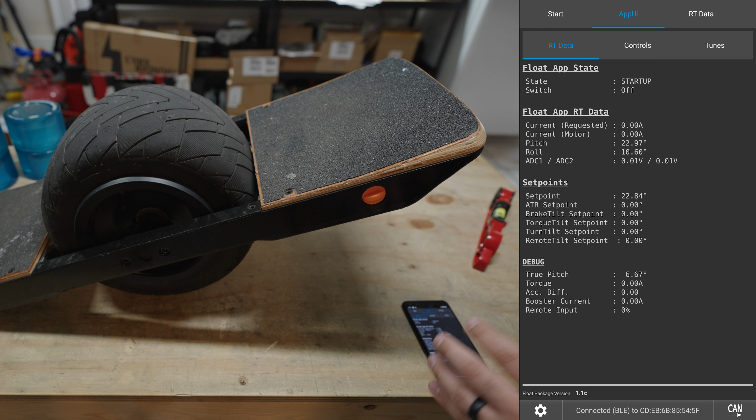Now, when you first install the float package, the values in it, as far as balancing is concerned, are usable. They may not be perfect for you, but they are usable and writable. However, what we need to do first is something very important, so we're going to go to Float Config, and this is going to be your interface for tuning the balance values of the board.

So before we do any of that stuff, we're going to set this to the appropriate values for this battery. If you skipped all the way to the back, go back to the front of the video where I talk about battery voltages - the motor values for cutting off the motor were set way down low, and that is that. What we're going to set here are the specs of the battery for tiltback, which is what VESC refers to as pushback if you're more one wheel inclined.

So we're going to go to the drop down - the default menu is Tune, and we're going to go to Specs. So disable float package - that's if you need to do motor configuration again or other stuff. It'll keep this from interfering with how the motor operates, but we're not touching that now. Loop hertz, leave that alone.

And here we go, voltage tiltbacks - these two are important. High voltage threshold: this is a voltage at which point it will tilt back or give you pushback to signify that you're overcharging the battery. This may happen if you charge the board to full and then ride down an incline, and through regen braking you overcharge the battery because you started at full to begin with.

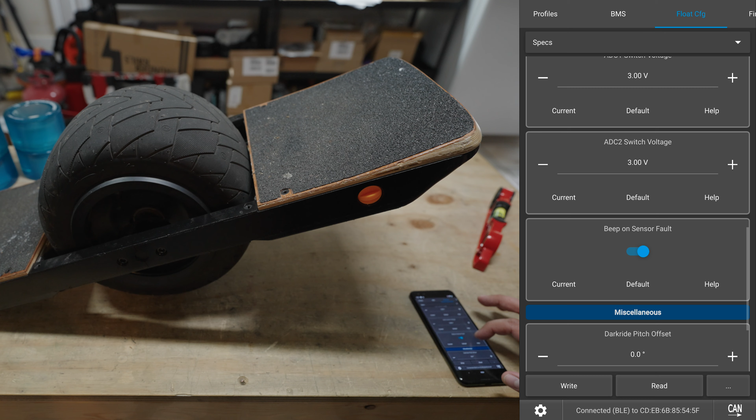The rest of this, you can just leave it alone. So we'll hit write, and that is the specs of this. So we now have low voltage tiltback set. The low voltage for cutting off the motor is way down low, below what we'd ever get to normally. And so now we can get to the rest of this stuff.

Fortunately, this will work pretty much as is, and you can test that. It's probably better to test it on the floor. I'm going to get my gloves and test it on the bench.

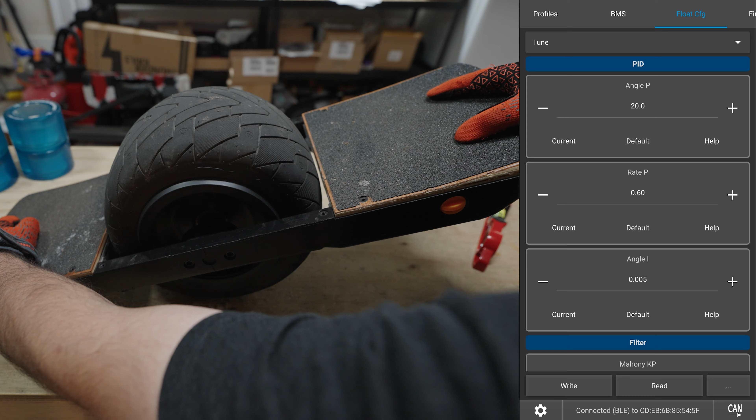All right, so it's functioning. So that's fine, so that's good. At this point, if you wanted to, you could stand on it and test it that way.

Surfdado has added a hand test feature in Float Package, so this enables you to test the board with your hands without the risk of a full power runaway if something was done wrong.

Now, at this point, it's pretty much functional. It can be ridden. It might not be the ride feel that you like, but the default tune in Float Package, after you set the specs up with the voltages and all that, it's rideable. It can be ridden and it'll function.

And so you can then adjust the values under tune and tune modifier in order to tailor the ride feel to what you prefer. You can try other people's tunes. I'm sure on the pev.dev forum and on the Facebook groups, people will share their tune settings and can help create more of a ride feel that works for you.

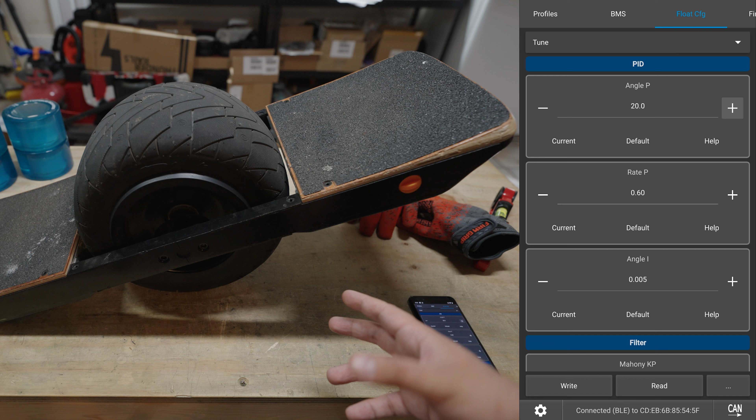I only changed a couple of things and I'll just do that now, but this is rideable as is, and then you would further test it on the ground by standing on it very carefully.

And so if this is your first time setting something up, I would leave the default tune as it is and test it first to make sure that it is functioning the way you expect it to, that it's responding to your lean and all that stuff the way it normally would.

And you would do that by just placing it on the floor, making sure you're in a relatively safe area, and holding onto something nearby just in case it's a bit wonky, or just go outside and try it in a safe area, the sidewalk or something, just to make sure that it functions normally.

So assuming that it does, which it seems to, I'm just going to go ahead and change a few values. And so I set angle P to 26. I set rate P to 0.80. I set angle I to 0.02.

I limit stays the same. Mahony KP I lower to 1.8, and that all stays the same. Hit write. All right, and then we'll drop down and go to ATR.

I like having ATR on, but I usually bring the ATR strength down to like 0.9, and that's about it. And then the rest of it I kind of just leave the same. That's about all I do.

And so at this point, it should be rideable. It should be functional. I'm going to go ahead and just take it outside and give it a quick go. And then that should be it.

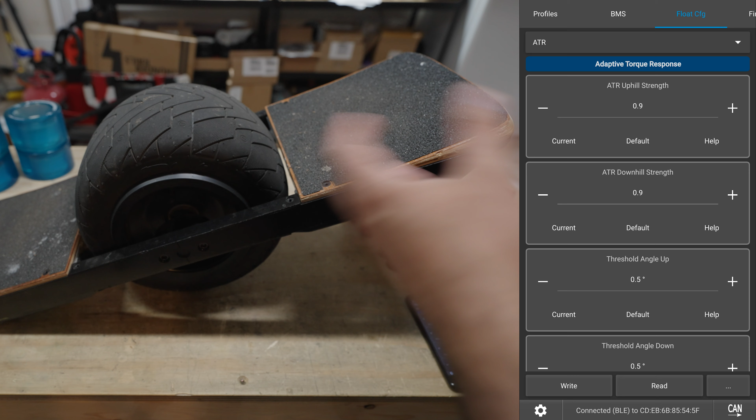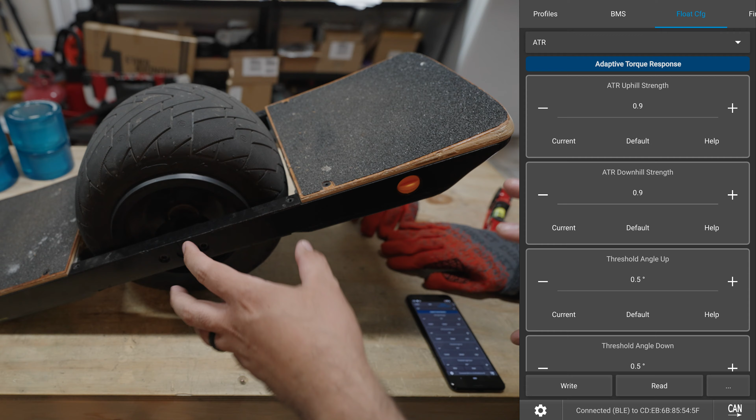And so that's about it. I hope that this was helpful. I hope it sort of brought some of the VESC setup a little bit lower to the ground for you. And thank you for watching.